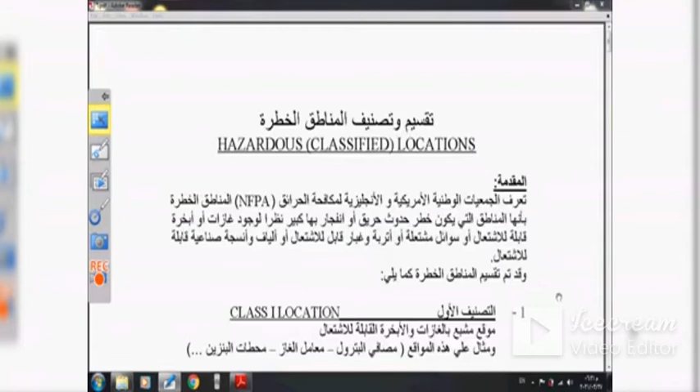قسموا المناطق الخطرة كما يلي: كلاس 1 لوكيشن أو التصنيف الأول. التصنيف الأول هو موقع مشبع بالغازات والأبخرة القابلة للاشتعال، وهو أعلى خطورة، الأعلى على الإطلاق. مثال هذه المواقع: مصافي البترول، معامل الغاز، محطات البنزين.

يعني باختصار ده التخصص الغالي اللي ولادنا الاحباء اختاروا إنهم يسلكوا المجال ده. فالأولى أن نبقى ناس شاطرين جدا في مجال الأمن الصناعي، طالما البيئة اللي بنشتغل فيها تصنيفها الهازاردوس عالي، دي كلاسيفيكيشن واحد، يعني الأعلى في الخطورة، يبقى بالتالي لازم نبقى الأعلى في الاستعداد، الأعلى في الثقافة بتاعة الأمن الصناعي، الأعلى في الفهم، الأعلى في إننا نخاف على نفسنا، الأعلى في إننا نطبق مبادئ السلامة والصحة المهنية، الأعلى في إننا نلتزم ونجعل غيرنا يلتزم.

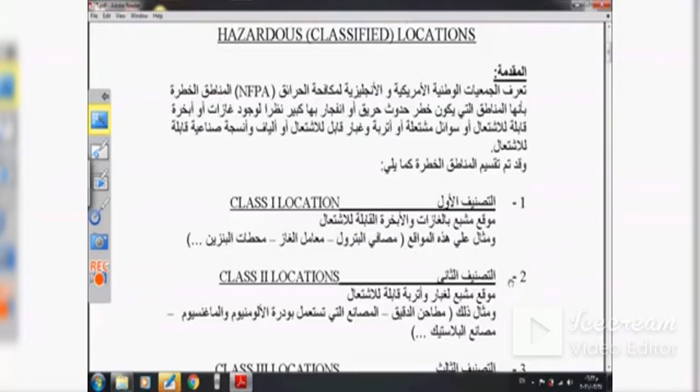التصنيف الثاني أو كلاس 2 لوكيشنز هي مواقع مشبعة بالغبار والأتربة القابلة للاشتعال، زي مطاحن الدقيق، المصانع التي تستعمل بودرة الألومنيوم والمغنيسيوم، مصانع البلاستيك، يعني شغل بتروكيماويات.

برضه له علاقة بحضرتك، يعني لو مش هتشتغل في المجال الأول، مش هتشتغل في مصافي البترول ومعامل الغاز ومحطات البنزين، فحضرتك هتشتغل في المصانع في شغل المغنيسيوم والبلاستيك والحاجات دي كلها.

التصنيف الثالث كلاس 3 لوكيشن هي مواقع بها مواد كالألياف، الأنسجة الصناعية القابلة للاشتعال، الحبايب، النسيج، حلج الأقطان، الملابس وخلافه. بخلاف المناطق الثلاث اللي فوق، بتقسم المناطق الخطرة إلى درجات وهي الحاجات الأقل من الثلاثة اللي هما الأعلى، وفي حاجات أقل منهم مجالات تانية، بنقسم الدنيا لكلاسز فقط.

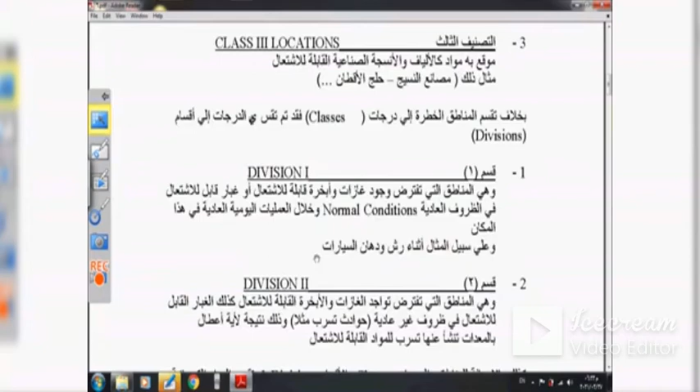تم تقسيم الدرجات إلى أقسام ديفيجنز، زي قسم رقم 1 وهي المناطق التي تفترض وجود غازات وأبخرة قابلة للاشتعال أو غبار قابل للاشتعال في الظروف العادية، طبيعتها هم عايشين وسط ده خلال العمليات اليومية العادية في هذه الأماكن. وعلى سبيل المثال رش ودهان السيارات، طول النهار بيشم في تنر وفي بوهية، طبعا قابل للاشتعال، وده بره الحاجات اللي فوق.

قسم 2 أو ديفيجن 2 هي المناطق التي تفترض تواجد الغازات والأبخرة القابلة للاشتعال، كذلك الغبار القابل للاشتعال في ظروف غير عادية أي حوادث، يعني الحاجات دي ما بتظهرش إلا في حدوث حوادث تسرب، نتيجة لأية أعطال بالمعدات تنشأ عنها تسرب للمواد القابلة للاشتعال. يعني الدنيا عنده بتبقى سليمة، ما عندوش مشاكل، والحاجة دي ما بتتواجدش إلا في حالة واحدة لو حصل تسريب.

كذلك بالإضافة للمناطق والدرجات كلاسز والأقسام ديفيجنز، بيتم تقسيم المواد الكيميائية القابلة للاشتعال إلى مجموعات، عندي مجموعات من الف لدال: الف وب وج ودال.

التصنيف الأول في الكلاس 1 اتقسمت المجموعات على حسب درجات الاشتعال والخواص الاشتعالية بتاعتها. مجموعة الف أعلى حاجة، مفيش أعلى منها، غاز الاستيلين. مجموعة ب اللي تحتها على طول الهيدروجين. كل دي من حيث قدرتها على الاشتعال والانفجار.

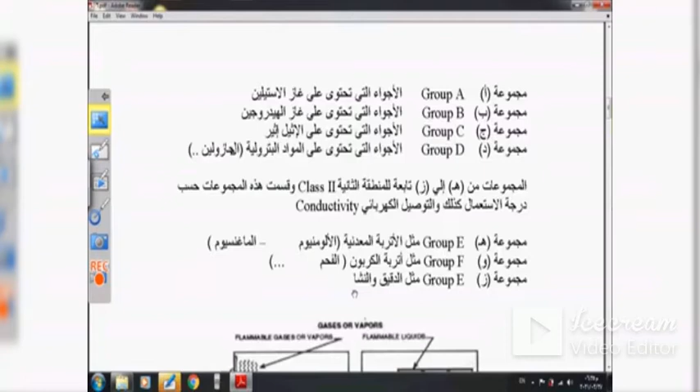بيشتعل بيولع. هو القمح ده مش بيولع؟ هو النشا والحاجة بتاعته مش بتولع؟ بتولع، بدليل العيش بيتحرق في الفرن، يعني ده أبسط مثال، لو سخنت الرغيف بيولع، يعني بيتحول لمركبات كربونية.

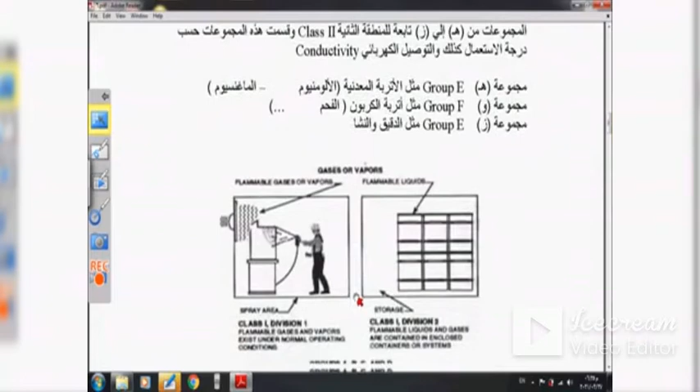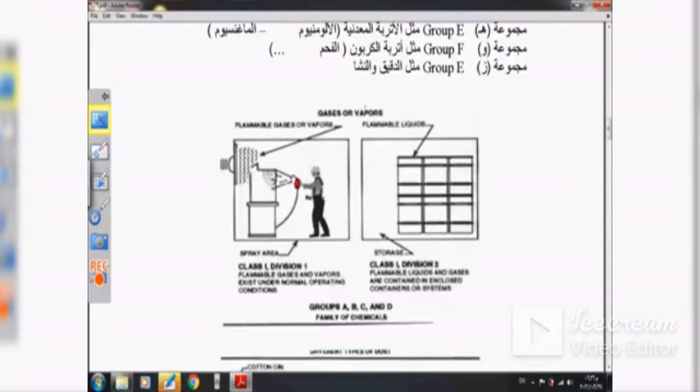طبعا الكلاسيفيكيشن ده بتاع الرجل اللي بيرش دوكو أو بيعمل الشغل ده، لازم يبقى فيه مصدر هواء متجدد، ولازم ما يبقاش فيه أبخرة متشبعة في المكان، لازم يبقى فيه شفاطات تسحب الزيادات وهكذا، وإلا هيحصل حاجة اسمها فليمابل، هيبقى عندك مشكلة، هيحصل لهب.

طبعا يبقى فيه شفاطات، وفي من فوق سبرينكلز أو ممكن نقول عليها بخاخات حريق، وطبعا بتبقى معزولة عن الإضاءة اللي فوق.

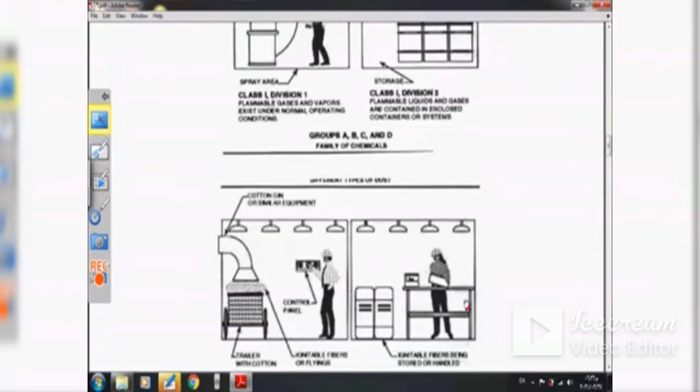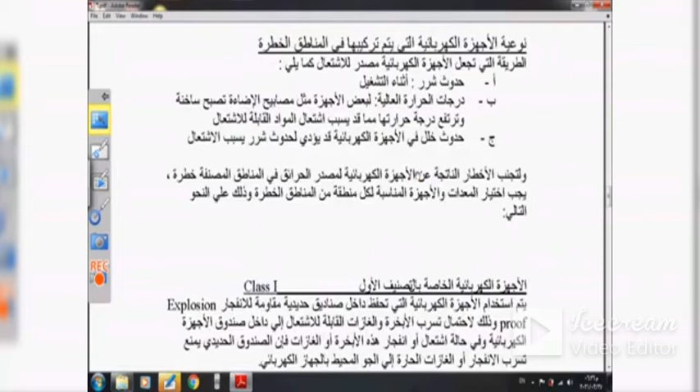نوعية الأجهزة الكهربائية اللي بيتم تركيبها في المناطق الخطرة بيبقى ليها مواصفات خاصة. الطريقة التي تجعل الأجهزة الكهربائية مصدر للاشتعال ان يحصل شرر، فبالتالي الصيانات الوقائية كل فترة لازم تتم.

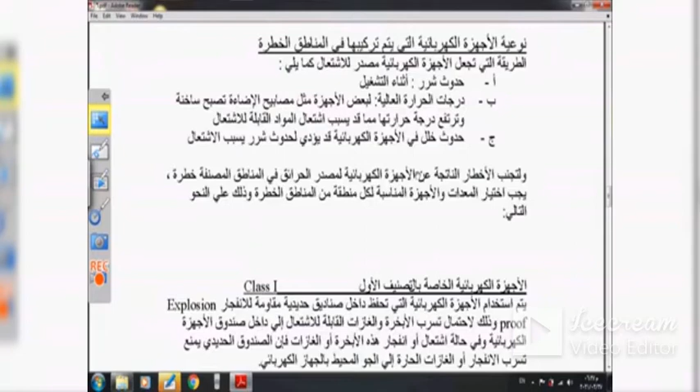والأجهزة المناسبة لكل منطقة من خلال المناطق الخطرة، لازم يبقى الدنيا كويسة. الأجهزة الكهربائية يتم استخدام الأجهزة التي تحفظ داخل صناديق حديدية مقاومة للانفجار، ده أساسي طالما المنطقة بتاعتك خطر.

يبقى الأجهزة الكهربائية كلها تتحط جوه صناديق، وذلك لاحتمال تسرب الأبخرة والغازات القابلة للاشتعال الى داخل صندوق الأجهزة الكهربائية. وفي حالة الاشتعال او الانفجار يبقى الانفجار داخل الصندوق، ومش هيطلع لبره ومش هيسبب كبسة، فإن الصندوق الحديدي يمنع تسرب الانفجار او الغازات الى الجو، وبالتالي ما يحصلش اصابات برة، تبقى الدنيا كلها جوه مش برة.

الأجهزة الكهربائية الخاصة بالتصنيف الثاني يتم استخدام أجهزة كهربائية عازلة للأتربة، بحيث يبقى الجهاز متأمن ما يخشوش تراب او غبار، فمع اي شرر داخلي الجهاز يتعزل حتى لا تدخل الأتربة الى داخل الجهاز الكهربي. كذلك لا يحدث زيادة في درجات الحرارة داخل هذه الأجهزة، وطبعا بيبقى له تهوية بطريقة معينة.

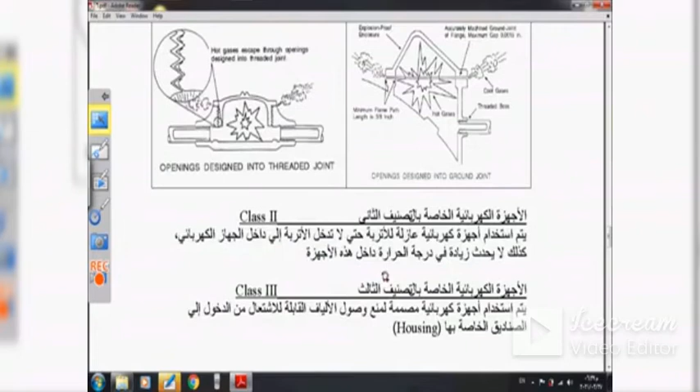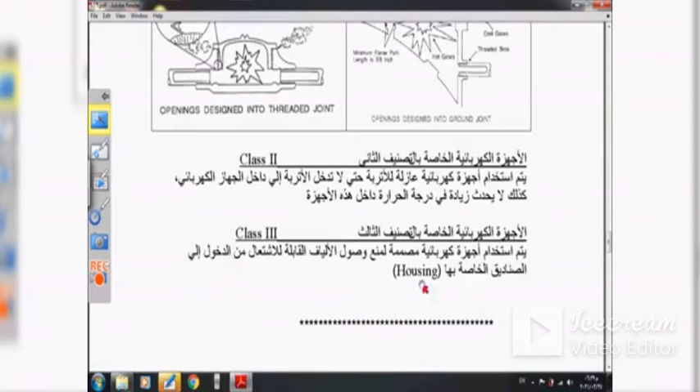الأجهزة الكهربائية الخاصة بالتصنيف الثالث يتم استخدام أجهزة مصممة لمنع وصول الألياف القابلة للاشتعال من الدخول، زي الألياف والقطن والفايبر وغبار القش والقمح، انها تخش جوه الصندوق بتاعها، بتتحط في هاوسنج او جوه كفر، فبالتالي ما يخشهاش حاجة.

يعني بيبقى في كفر قافل الدنيا، والجهاز بتاعك بيبقى جوه، بحيث لو في مشكلة برة العزل ده ما يخليهاش توصل لجوه، فبالتالي ما يعملش نصيبة.

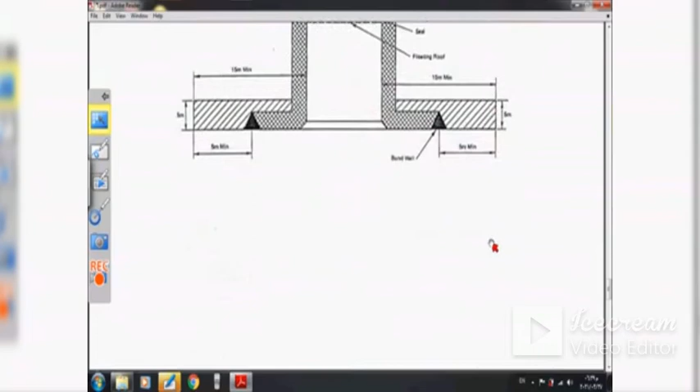The first type of hazard is created by the presence of flammable gases or vapors in the air, such as natural gas or gasoline vapor. When these materials are found in the atmosphere, a potential for explosion exists, which could be ignited if an electrical or other source of ignition is present. The code writers have referred to this type of hazard as Class 1. So a Class 1 hazardous location is one in which flammable gases or vapors may be present in the air in sufficient quantities to be explosive or ignitable.

Some typical Class 1 locations are petroleum refineries and gasoline storage and dispensing areas, dry cleaning plants, where vapors from cleaning fluids can be present, aircraft hangars, and utility gas plants and operations involving storage and handling of liquefied petroleum or natural gas.

The second type of hazard listed by the National Electrical Code are those areas made hazardous by the presence of combustible dust. These are referred to in the code as Class 2 locations. Finely pulverized material suspended in the atmosphere can cause as powerful an explosion as occurring in a petroleum refinery.

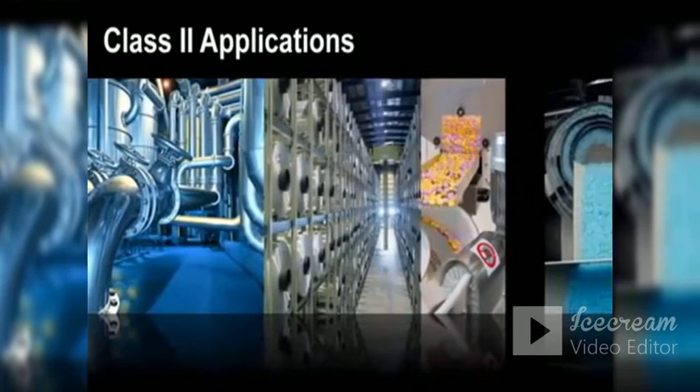Some typical Class 2 locations are grain elevators, flour and feed mills, plants that manufacture, use, or store magnesium or aluminum powders, producers of plastics, medicines, or fireworks, producers of starch or candies, spice grinding plants, sugar plants, or cocoa plants, and coal preparation plants or other carbon handling or processing areas.

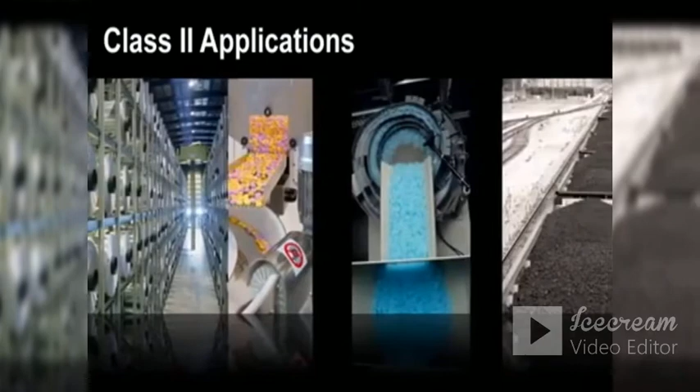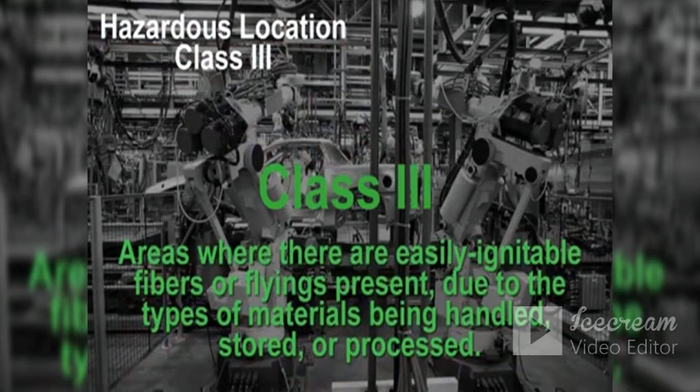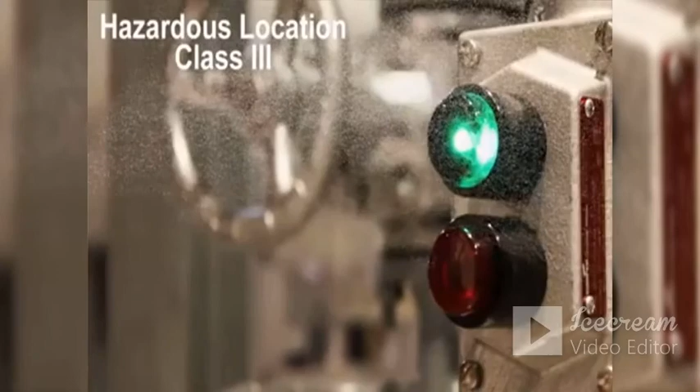Class 3 hazardous locations, according to the NEC, are areas where there are easily ignitable fibers or flyings present due to the types of materials being handled, stored, or processed. The fibers and flyings are not likely to be suspended in the air, but can collect on machinery or lighting fixtures where heat, a spark, or hot metal can ignite them.

Some typical Class 3 locations are cottonseed mills and facilities that shape, pulverize, or cut wood and create sawdust or flyings.

In addition to these types of hazardous locations, the National Electrical Code also concerns itself with the kinds of conditions under which these hazards are present. The code specifies that hazardous material may exist in several different kinds of conditions, which for simplicity can be described as, first, normal conditions, and second, abnormal conditions. In the normal condition, the hazard would be expected to be present in everyday production operations. When the hazardous material is expected to be confined within closed containers or closed systems and will be present only during accidental rupture, breakage, or unusual faulty operation, the situation could be called abnormal.

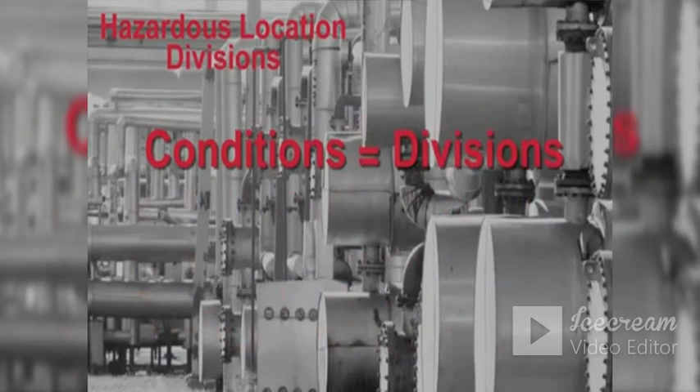The code writers have designated these two kinds of conditions very simply as Division 1, normal, and Division 2, abnormal. Class 1, Class 2, and Class 3 hazardous locations can be either Division 1 or Division 2. Good examples of Class 1 Division 1 locations would be the areas near open dome loading facilities or adjacent to the relief valves in a petroleum refinery, because the hazardous material would be present during normal plant operations.

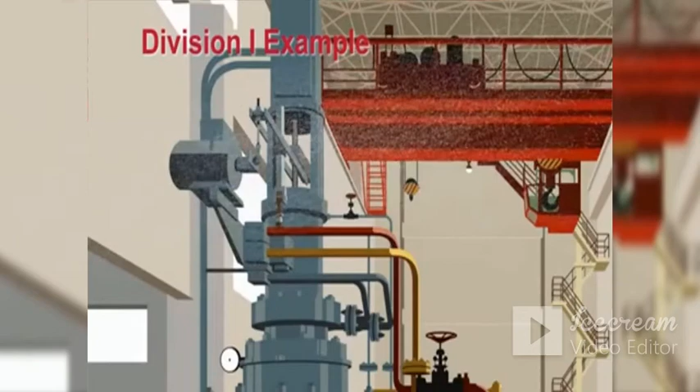So far we've covered the three types of hazardous locations: Class 1, gas or vapors; Class 2, dust; and Class 3, fibers and flyings. And secondly, two types of conditions: Division 1, normal conditions, and Division 2, abnormal conditions.

Now let's move on to discuss the nature of hazardous substances. The gases and vapors of Class 1 locations are broken into 4 groups by the code: A, B, C, and D. These materials are grouped according to the ignition temperature of the substance, its explosive pressure, and other flammable characteristics.

The only substance in Group A is acetylene. Acetylene makes up only a very small percentage of hazardous locations and is a gas with extremely high explosion pressures.

Group B is another relatively small segment of classified areas. This group includes hydrogen and other materials with similar characteristics. By following the NEC code, some of these Group B locations, other than hydrogen, can actually be satisfied with Group C and Group D equipment.

Group C and Group D are by far the most usual Class 1 groups. They comprise the greatest percentage of all Class 1 hazardous locations. Found in Group D are many of the most common flammable substances, such as butane, gasoline, natural gas, and propane.

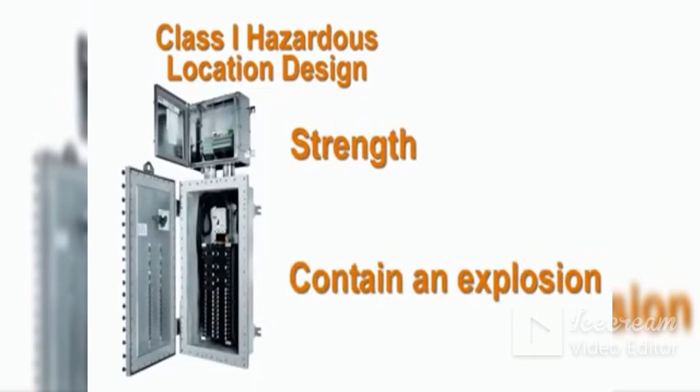Now let's get down to the specific hardware and how it is designed and constructed to be suitable for hazardous locations, starting with those designed for Class 1, gas or vapor applications. The first requirement for a Class 1 enclosure is strength. The enclosure must be strong enough to contain the explosion within, and the walls must be thick enough to withstand the internal strain. It also has to be explosion-proof in case gas or vapors get inside.

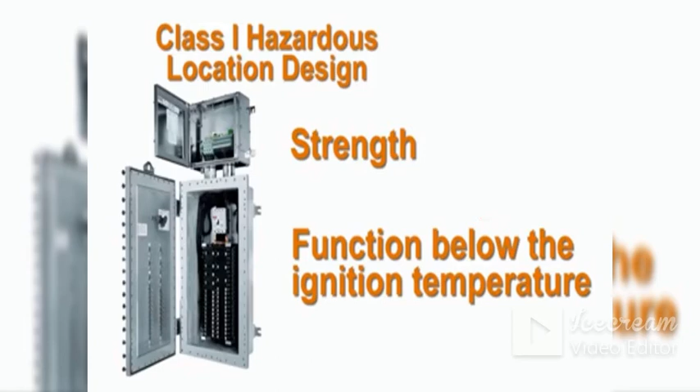Secondly, it must function at a temperature below the ignition temperature of the surrounding atmosphere. The equipment must also provide a way for burning gases to escape from the device as they expand during an internal explosion, but only after they have been cooled off and their flames have been quenched. This escape route for the exploding gases is provided through several types of flame paths.

An example is the ground surface flame path. Here, the surfaces are ground, mated, and held to a tolerance of 15/10,000ths of an inch. This permits gases to escape, but only after they've been sufficiently cooled, so they won't ignite the volatile surrounding atmosphere.

Another example of the flame path is the threaded type. After an explosion, the gas travels out through the threaded joint, but as it does, the explosion cools off, allowing the flame to not ignite the hazardous atmosphere.

However, in the case of Class 2, the assumptions are different, and in turn, the design is different. In Class 2, the explosive dust is kept away from equipment housed within the enclosure, so that no internal explosion can take place, and there is no longer a need for any heavy explosion-containing construction or flame paths. This difference explains why Class 1 Division 1 equipment can be called explosion-proof, and Class 2 equipment is called dust ignition-proof. Class 2 equipment has a different set of requirements.

1. It must seal the outside dust. 2. It must operate below the ignition temperature of the hazardous substance. And 3. It must also allow for a dust blanket, which is the buildup of dust collecting on top of the device that can cause it to run hot and ignite the surrounding atmosphere.

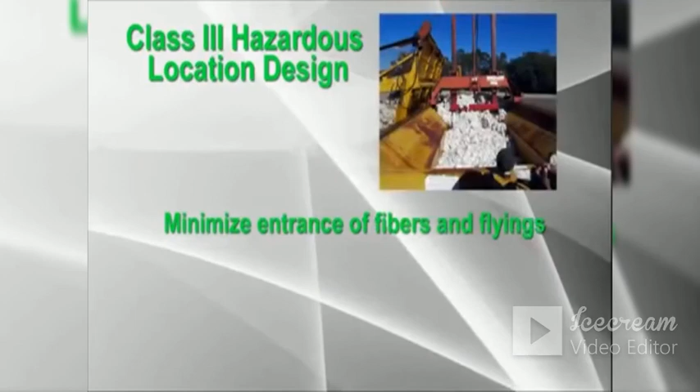For Class 3 equipment, there is very little difference from the design of Class 2. Class 3 equipment must minimize the entrance of fibers and flyings, prevent the escape of sparks, burning material, or hot metal particles resulting from the failure of equipment, and operate at normal temperature that will prevent the ignition of fibers accumulated on the equipment.

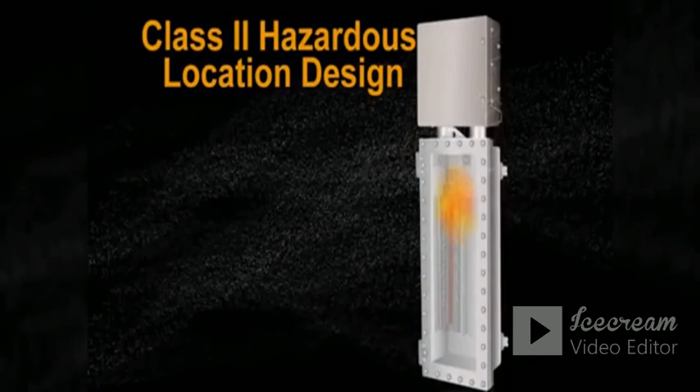There are many enclosures, devices, and fixtures suitable for all three classes. This simply means that it meets the specifications for each individual type. A Class 1 device, which could contain an explosion of a specific gas, would also have to prevent dust from entering the enclosure to be suitable for Class 2. The close tolerance of the flame path, which cools the burning gases, is also close enough to exclude explosive dust so that the gasket would not be needed.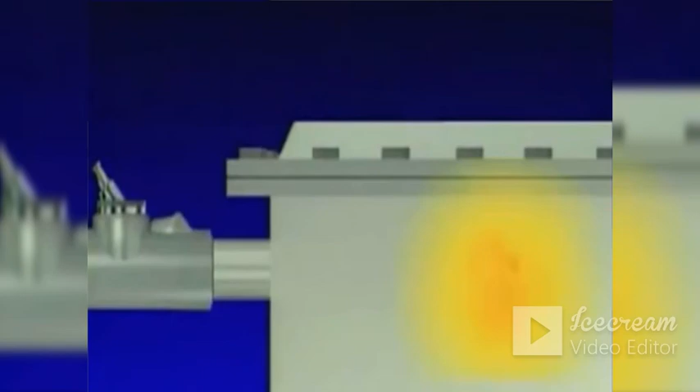Proper installation of hazardous location equipment calls for the use of seals. Special fittings are required to keep hot gases from traveling through the conduit system, igniting other areas in the event of an internal explosion. They are also needed in certain situations to keep flammable dust from entering the dust ignition-proof enclosures through the conduit. When arcs and sparks cause ignition of flammable gases and vapors, the equipment contains the explosion and vents only cool gases into the surrounding hazardous area.

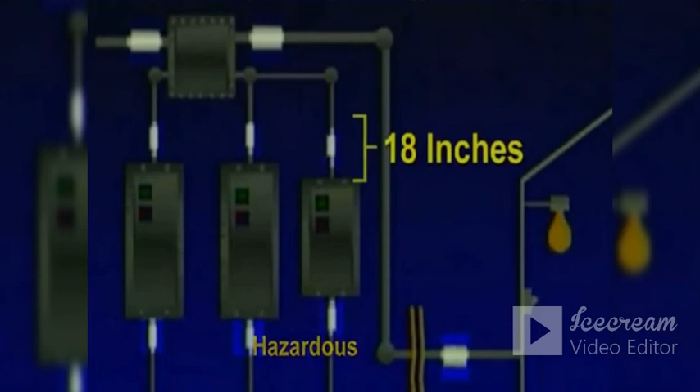Sealing fittings are designed to be filled with a chemical compound after the wires have been pulled. As the compound hardens, it seals passageways for dust and gases. Within each conduit run that enters an enclosure for switches, circuit breakers, fuses, relays, resistors, or other apparatus which may produce arcs, sparks, or high temperatures within hazardous locations, conduit seals should be placed as close as possible and in no case more than 18 inches from the enclosure.

In summary, NEC hazardous locations are classified in three ways: type, condition, and nature. The types are gas, vapor, dust, and fibers or flyings. The conditions are normal or abnormal, indicating the probability of hazardous materials in the atmosphere. And the nature dictates the explosive pressure and flammability of hazardous substance within the environment, indicated by letters A through G. All equipment within hazardous locations must protect against three predominant types of ignition: arc or spark, high temperature, and equipment failure.

Within NEC-rated materials, the design and construction must have high strength, a path for explosive materials to be extinguished, or provide protection from dust buildup.